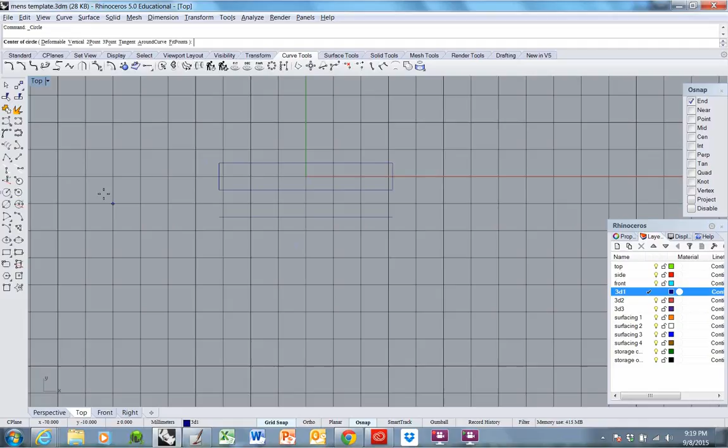I would like to have a copy of this from the front view to draw. So a starting point for that will be just to have a straight line at this length that I can use. That's fine. Going to go ahead and draw the front view around the finger on the round. It'll look like so. Diameter was 20.20, so here we go.

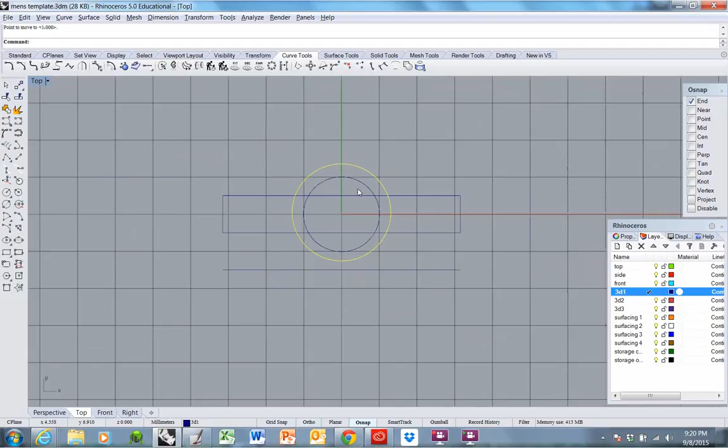Average men's ring thickness would be about 3 millimeters around the sides of the finger. It'll be about 2 millimeters at the bottom, and it would swell up thicker on top normally. So I'm going to go ahead and move this outer curve up 1 millimeter. That'll give me an automatic sort of swept or tapered front view that I can choose to follow or not. Actually, I think that's a little extreme. Maybe I'll move it 0.5 millimeter up. Doesn't really matter at this point. This is more of a sketch. Move this down, get it out of the way. Okay.

I would like to reflect these thicknesses here. So I want to know what the distances are. I know this is 2.5 millimeters, so I'll put a copy of this line 2.5 millimeters up. I know that at the sides here it's 3 millimeters. That's what I had set it to do. So I'll put a curve up 3 millimeters from there. You can see the 0.5 millimeter difference here. And then I want to know what this distance is. That distance is 3.5 millimeters, so I'll put a copy of this curve at 3.5 millimeters.

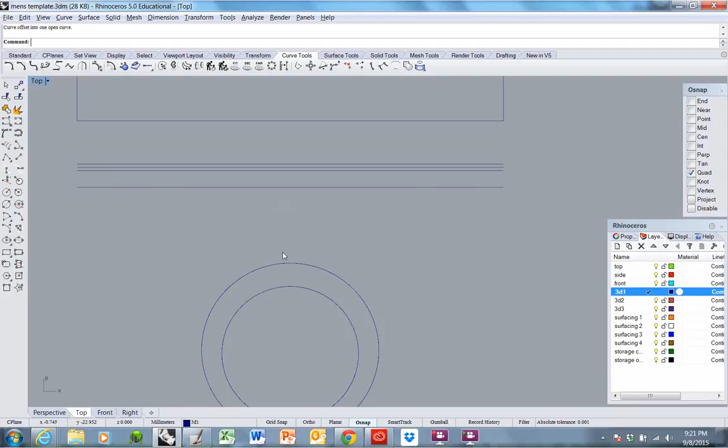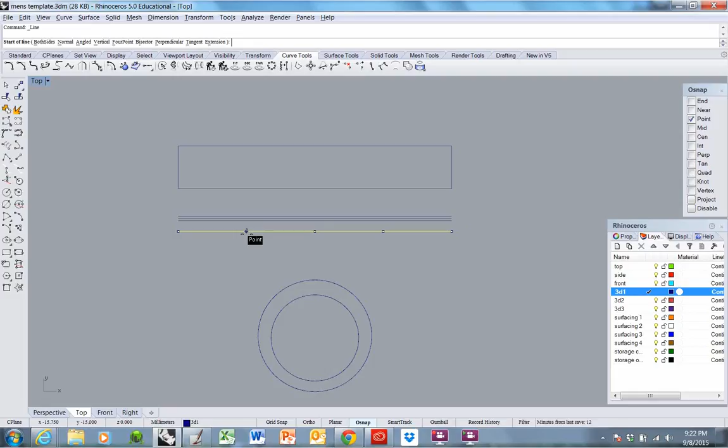So I have the baseline, which reflects the inside of the finger tube, laid out flat. First thickness is at the bottom of the finger, second thickness is at the sides of the shank, final thickness is at the top. Okay. I want to divide this the way we had done in class. Remember, we had divided it into fourths. And then we split these center sections in half again. So I'll do that here as well.

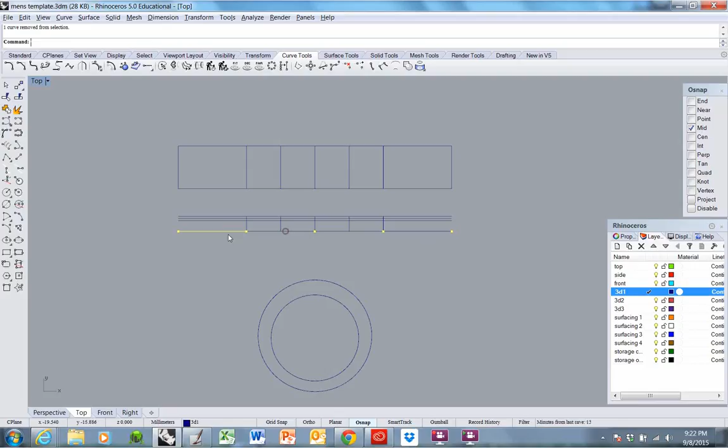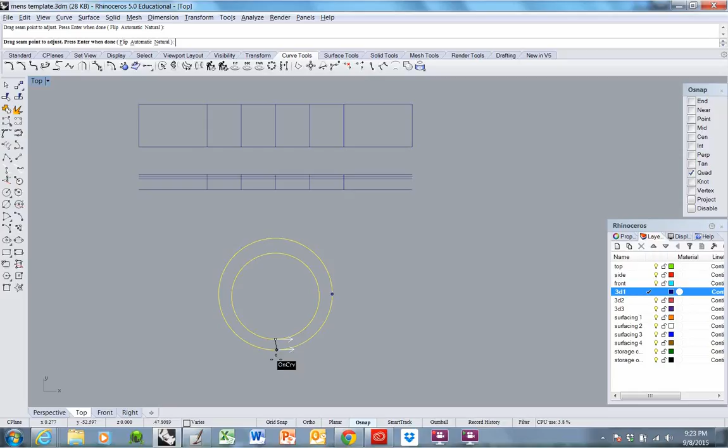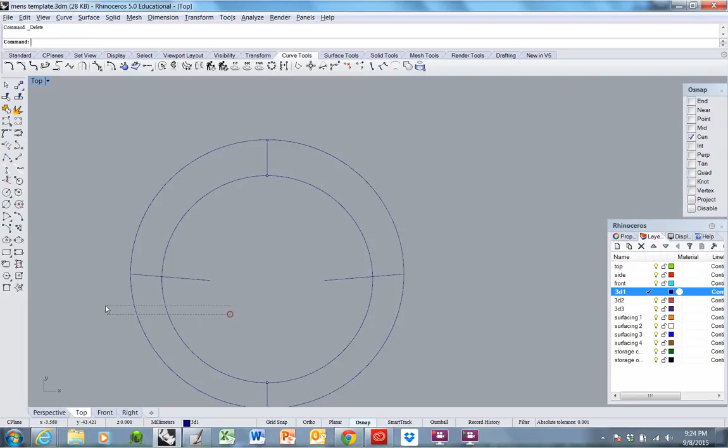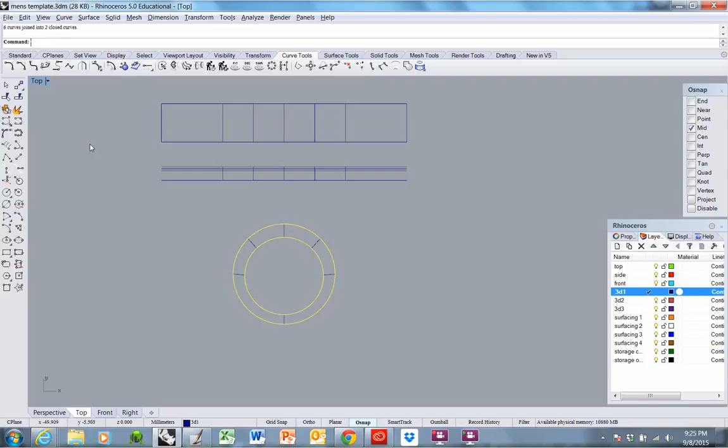I want to divide this front view around the finger in the same way. I don't much care for what's happening here, so I'll average that out so it looks more normal. There, that's better. Okay. And like we did here, I'll split these two middle segments of the top section in half. Alright.

So this line represents this line. This is the seam, which would be the two boundaries here. I may as well draw those. That's where these two would meet as it bends around the finger and joins in the back. Also equal to these two curves, here and here. These are the midway. Those represent these. Remember, no detail between here and here is really going to be significant unless you're doing a pattern that goes all the way around, because it's the underside of the ring. This is the top half of the ring.

Okay. Represented by that, and this is the most important section, where most of the detail that you'll see from the top of the ring will be located, because between here and here it already becomes quite truncated. Alright, so that's my template.

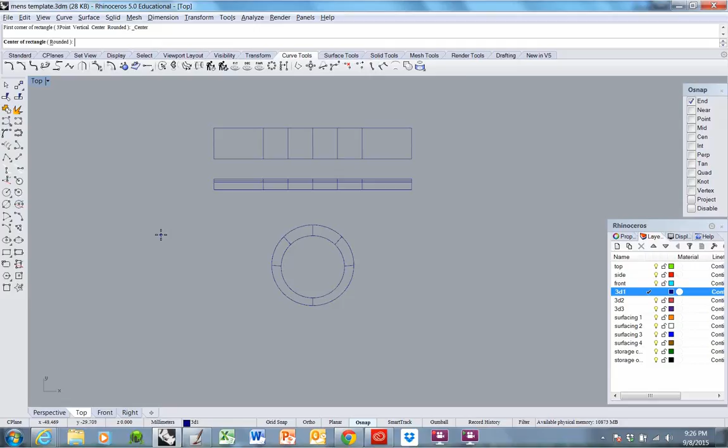I'm going to be taking this into Adobe Illustrator to handle it a little bit, and knowing I'm going to do that, it just makes it easier if I put a box around it. You'll see why. Going to export this out of here. I want it to maintain the model scale. Everything's good. Fine. Save this as well, and go into Illustrator.

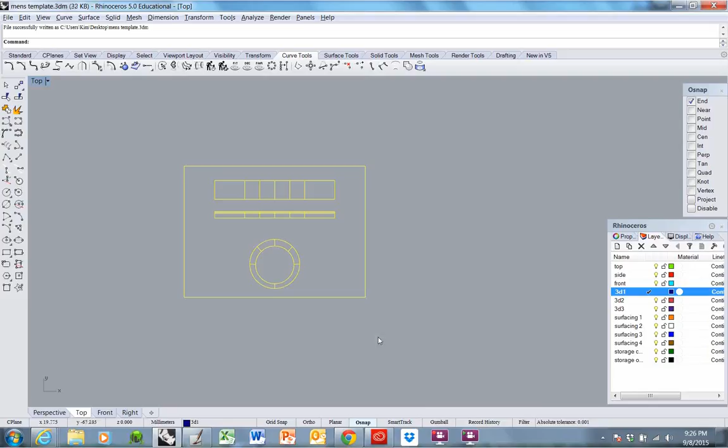Okay. Going to go ahead and open the file I just made off my desktop. Okay. You'll see it's way down here. That's fine. Just drag a window around it. I'll select it, group them all together, and move them up into the paper space.

You can see these lines come in very thick from Rhino. You don't really have any control in Rhino over the export line thickness. You have control over how thick a line prints, but you don't have control over how thick a line exports.

So the workaround I've always used is to bring it into Illustrator, and then I just set the line thickness here, and usually 0.3 to 0.35 is fine for a template. If I was going to do a technical drawing, I'd take it down to 0.2 or 0.25. Okay? That gives me a much finer line weight. And now I'm going to bring this into Painter where I will draw on it.

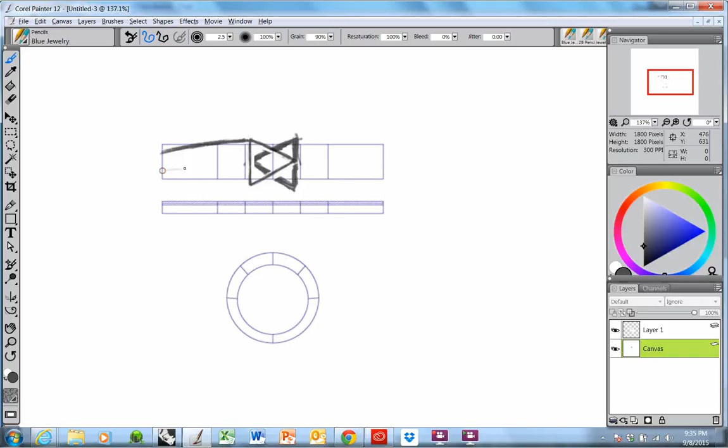I think I like the idea of doing what we call a bypass ring in the jewelry industry. Or at least kind of a bypass theme, where it kind of, you'll see what I mean. It's kind of an over and under effect.

When I'm doing a bypass ring, it's important that I end up under the finger here in the same place on both sides. So I'm eyeballing that to try and be a little bit careful. And what I wanted is some hollowness. I wanted an air line, a negative space in here.

Now, remember that this area from here to here is from here to here. And I want this opening to end about here, which means I actually want it to end just a little ways below this line. I want this to be kind of central, to kind of pick out the middle. It's a little up from middle right now.

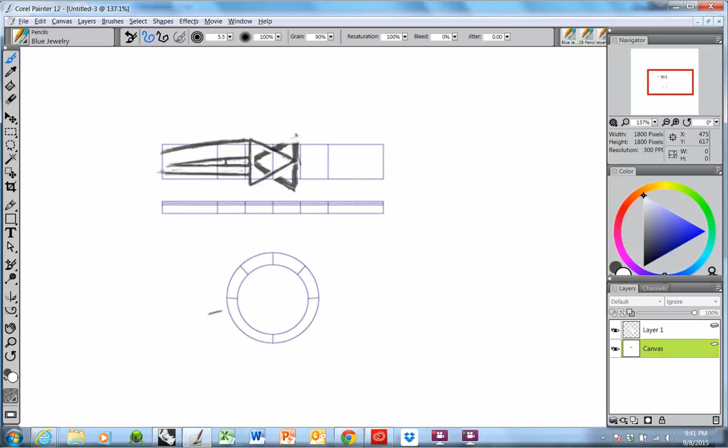And before I do, I'm going to go ahead and paint out or draw out these other portions that I had before. Do a little erasing. And trim the thickness down on this a bit. That line's just really heavy. Okay.

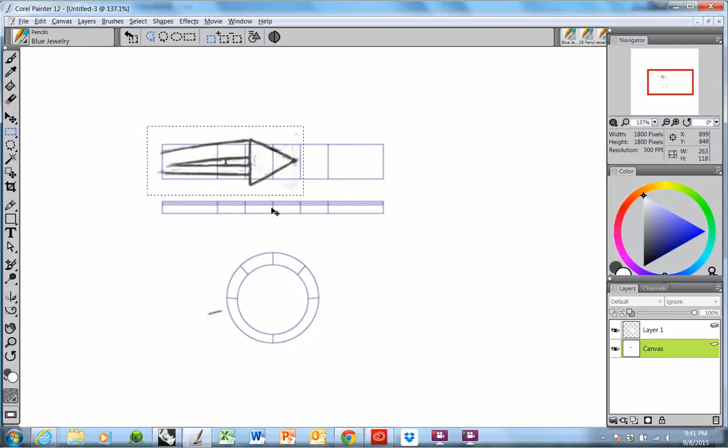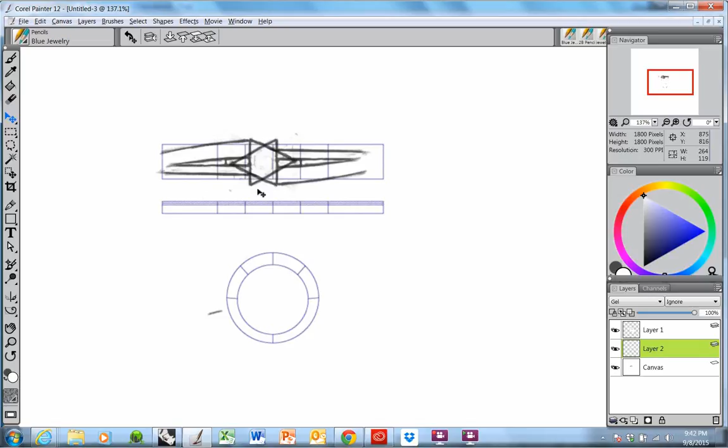Pick it up. Flip it around. This time, instead of just mirroring it, I'm going to rotate it 180 degrees. Put it back to a gel layer so I can see through it. I want them to line up, so I will line it up here and then bring it straight over. Going to look at this thickness and make sure they're about the same. Okay?

That's fine. Yeah, that's alright. So I'll go ahead and put that down on the canvas. Put it down on the ground. See, before I do, I'm going to decide which one of these I want to be on top. I want one of these to be above the other. And I think I'll keep it the way I'd started it, and that is to keep